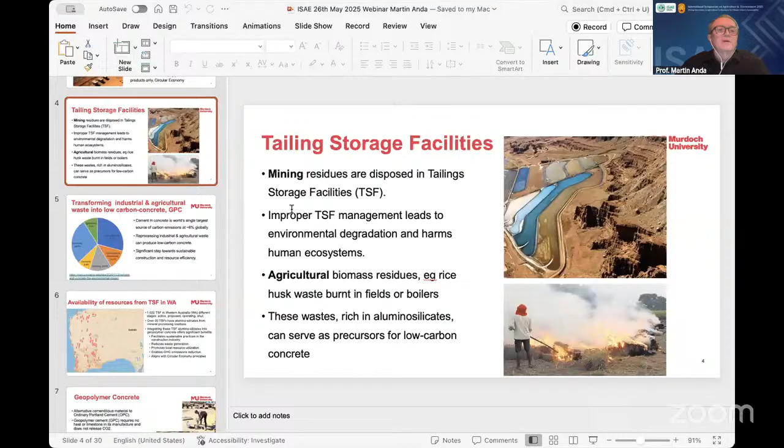Would you like me to share my slides from here? Should I share my screen with you, Mrs. Chinta? Or would you like to show the slides from your side? What's best? You can share, Prof. Martin. Okay, alright, let me have a look. Let me share my screen. Okay, how is that? Can you see my screen? Yes, now we can see the screen. Yes, very good, we can see your screen now.

Okay, so today everyone, Mrs. Chinta asked me to speak on industrial wastes to low carbon geopolymer concrete. So I will largely speak from the perspective of my work here in Australia, but as I mentioned, I was very lucky to be able to visit Sri Lanka in January for the first time.

Excuse me, Mrs. Professor Martin, sorry for disturbing you. Can you move to PowerPoint presentation mode? Yes, please, is it not in that already? Still mean full screen mode? Right, yeah, right now. Yes, okay, that's fine. There we are. Thank you very much.

Very good, there we are. Okay, so luckily, because I was able to visit Sri Lanka in January, I was able to meet Mrs. Chinta and other colleagues at the University of Ruhuna and come to understand that they have a great interest in this area of low carbon construction materials, particularly derived from agricultural residues and waste. I realised it was going to be a great opportunity for us to work together and collaborate. So let me give this presentation today with a focus largely from the perspective of Australia, what we're doing there, but also some insights into what may be possible in Sri Lanka if we were able to work together in this space of low carbon construction materials from industrial waste, particularly for geopolymer concrete.

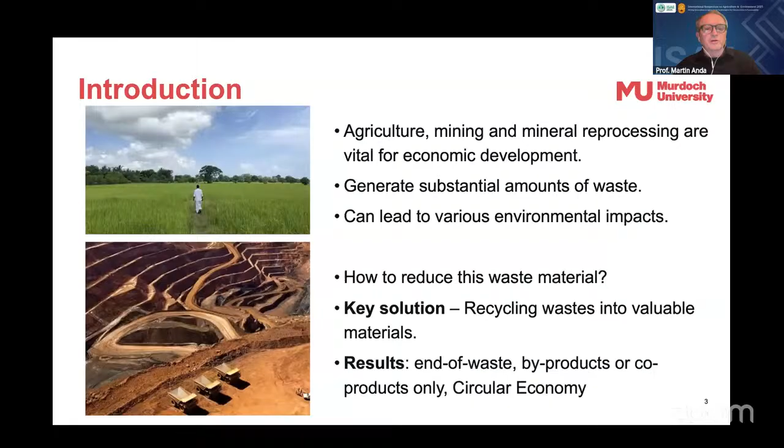In Australia particularly, we have a lot of tailing storage facilities. These are the mineral residues that are disposed of in the tailings dams. I guess there may be some in Sri Lanka as well, even though there's not a big mining industry there. For example, in the coal-fired power station in the north of the country, I haven't visited there, but I guess there may be some storage of the fly ash after the coal is burnt, in large storage dams, but I need to look into that further. A lot of that fly ash I know is already used in the concrete industries as a supplementary cementitious material.

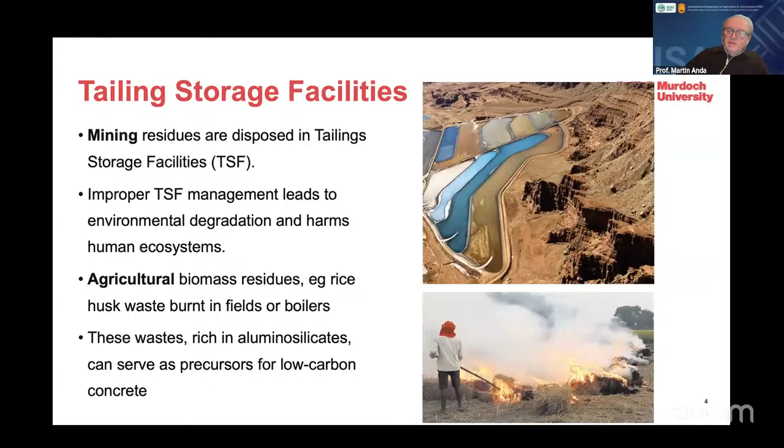Now, the improper management of these tailings can lead to environmental degradation, and can harm human ecosystems. Likewise, the agricultural biomass residues, for example, what we may see in Sri Lanka is the rice husk ash from when this is burnt in the fields or in the boilers for other processing operations. Now, these wastes are rich in aluminosilicates, and we can actually use these as precursors to make a low carbon concrete that we may call a geopolymer or an alkali activated material.

So if we look at transforming these industrial and agricultural waste into low carbon concrete, a geopolymer concrete, the background here is that cement is the world's single largest source of carbon emissions, as you can see in the pie chart here, at around 8% of global emissions. And the reprocessing of these industrial and agricultural residues can produce this low carbon concrete, for example, geopolymer or alkali activated cement. And this could be a significant step towards sustainable construction and resource efficiency.

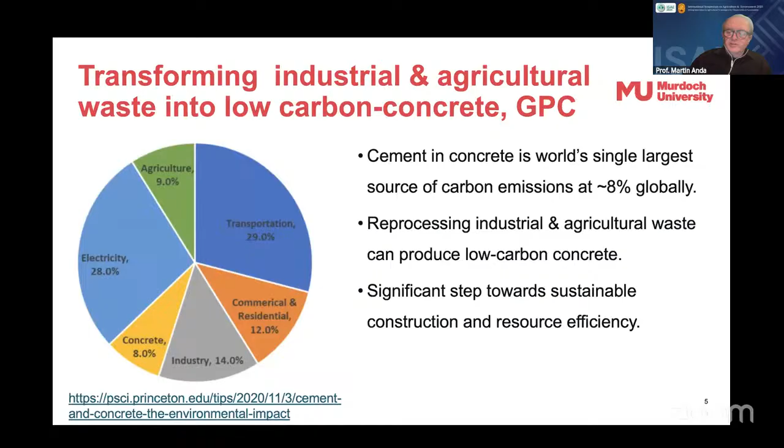Now, where I'm based in the state of Western Australia, we now know through some work that we've started by my research team, and in particular, the present paper is being written by one of our research students. Her name is Amitha Varghese, and in the work that she started, she identified from various environmental approvals that there are some 1,000 tailing storage facilities in various stages of operation. They're either active or proposed, or they're operating, or they're actually closed already. Some of them, of course, are very old. They might be 100 years old from old gold mining operations, for example.

And in her work, she was also able to establish that probably 50 of these do have the aluminosilicates that we're looking for to convert them into a precursor for geopolymer concrete. Now, by using these tailings and the aluminosilicates in them, where they occur, this geopolymer concrete offers a number of benefits and opportunities. It facilitates sustainable construction, reduces waste generation, promotes local resource utilisation, and enables greenhouse gas emissions reduction. And as mentioned, this aligns with those principles of circular economy.

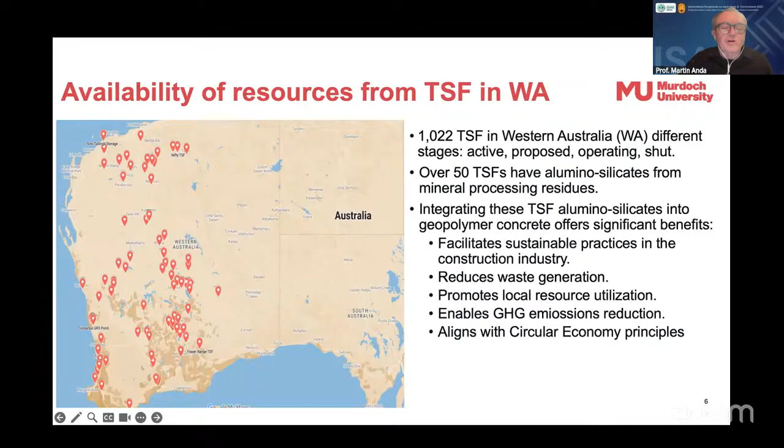Okay, so geopolymer concrete, what is it then? This is an alternative cementitious material to ordinary Portland cement, which is commonly used to make concrete at about 10% of the total volume of the concrete, along with sand, aggregate, small stones, and water. But geopolymer cement is quite different in that it requires no heat or limestone in its manufacture, and does not release CO2 in a way that you might know from the manufacture of ordinary Portland cement, which is made in very large kilns, where coal is typically burnt to do that in large rotary kilns.

And of course, Sri Lanka does manufacture cement, and there is a kiln, I believe, in the north, and Sri Lanka also imports clinker. And I was lucky enough to go with colleagues from University of Ruhuna to a cement factory in Galle while I was there in January. So that was great to visit that and see the large scale of cement production there. But of course, this is the high carbon footprint material.

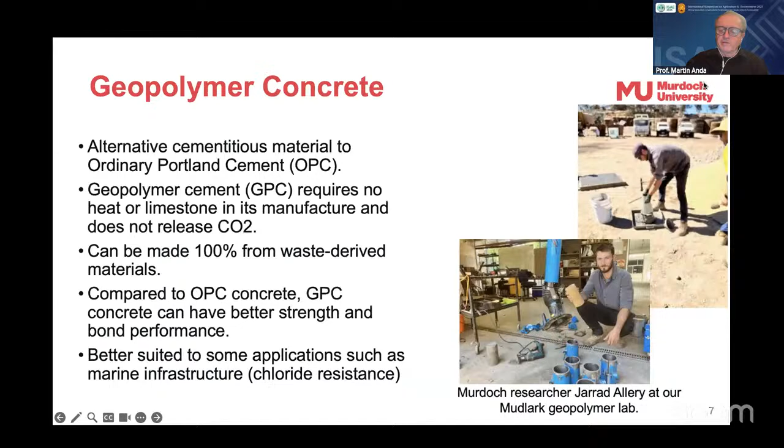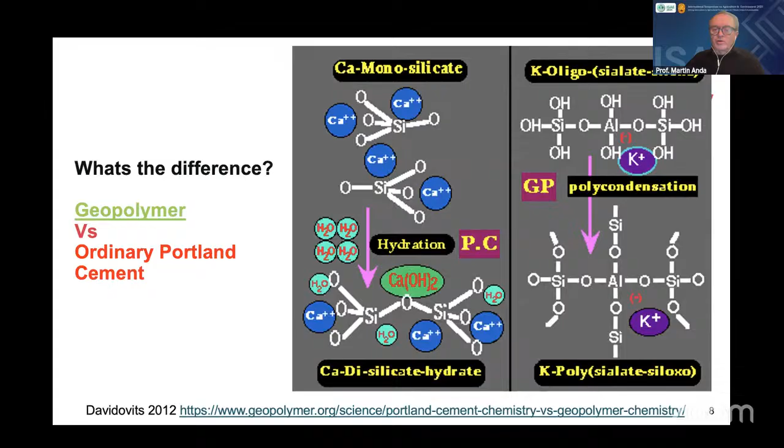If you want to learn more about the very complex chemistry behind these two different systems, you can download this paper by Professor Davidovits in France. He's the world leader, really, and has probably been working on this since the 1970s. But I did read once that it was a Ukrainian professor in the 1950s who first started this scientific work on geopolymers, so the history is quite interesting, in fact.

Now, if we look at the properties of geopolymer concrete, we find that, if prepared effectively, it can achieve superior strength and bonding compared to ordinary Portland cement. It can have superior mechanical properties in flexural strength, compressive strength, modulus of elasticity, and durability, and it can achieve chemical resistance as well, ensuring its durability in construction projects.

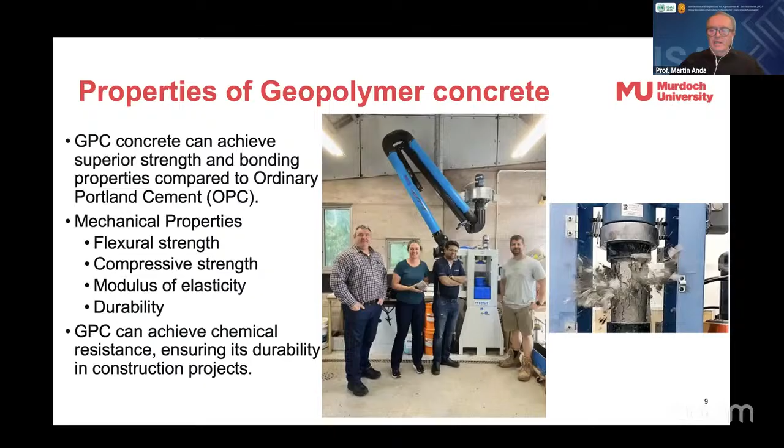Interestingly, one application where geopolymer is used, in addition to marine infrastructure projects, is actually in sewer pipes. In large sewer pipes, geopolymer can resist attack from various gases and chemicals that may occur in sewage traveling long distances. There's actually a company in Melbourne, Rocla, that manufactures on-order sewer pipes from geopolymer, so you can see some particular applications because of these benefits.

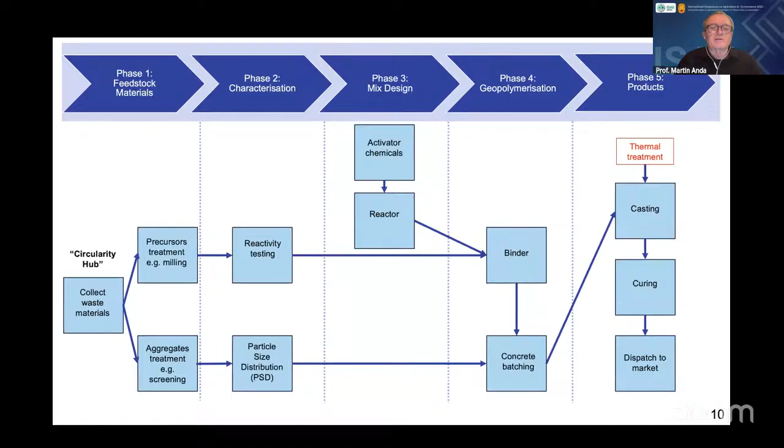Now, what I've done is prepared a diagram here that shows the different phases we go through in the manufacture of geopolymer concrete: 5 phases — the feedstock materials, the characterization, the mix design, the geopolymerization, and the products.

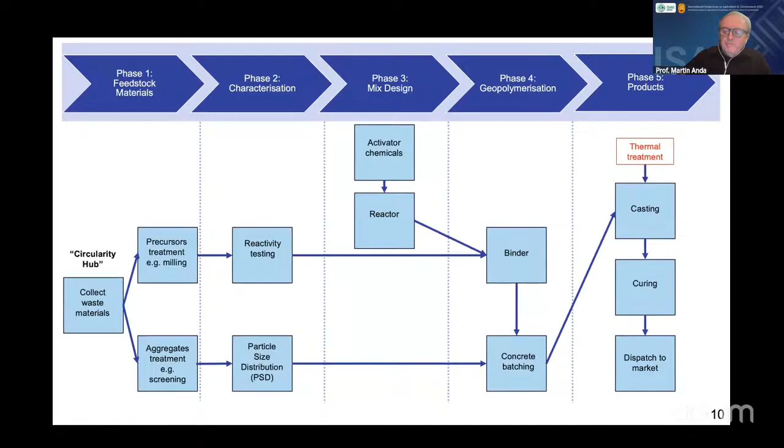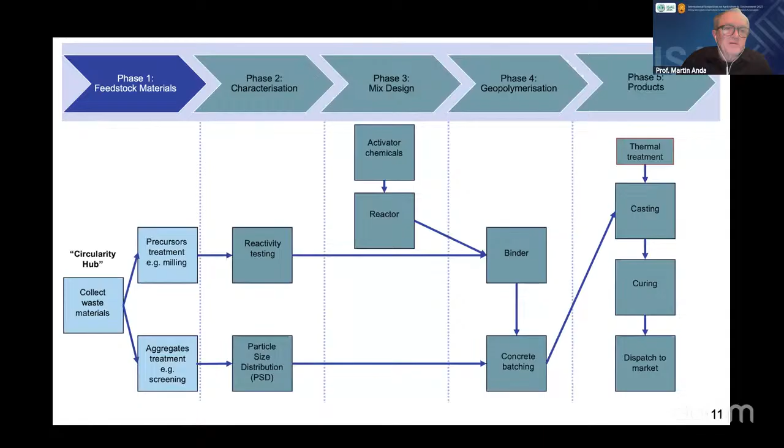If we start with phase 1, we want to collect the waste materials. It could be from tailings storage facilities, rice husk ash and boiler ash around Sri Lanka, or fly ash dams. What I've been looking at is these collection areas — we could call them circularity hubs — where we bring together a range of different materials to use both as precursors to make the geopolymer concrete, or as aggregates in the concrete itself. We may need some pre-treatment here, milling of the fly ash, for example, or screening of the aggregates if it's construction and demolition waste or coarse mine tailings.

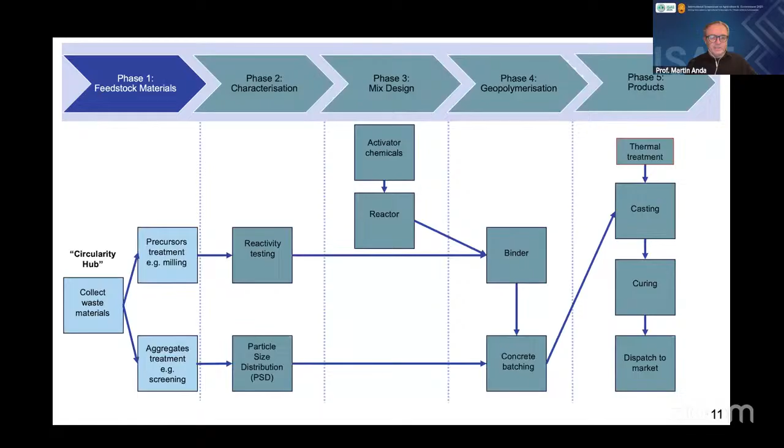In phase 2, we need to characterize these waste materials, and there's a whole raft of tests we'd do to determine the reactivity of the material. In other words, we're particularly looking at how much of the aluminosilicates in these industrial wastes are in the amorphous phase, and then we can determine a mix design from that — what type of activator chemicals we need to add. But if these wastes are going to be the aggregates, we might need to do a range of testing on them, such as particle size distribution and compressive strength.

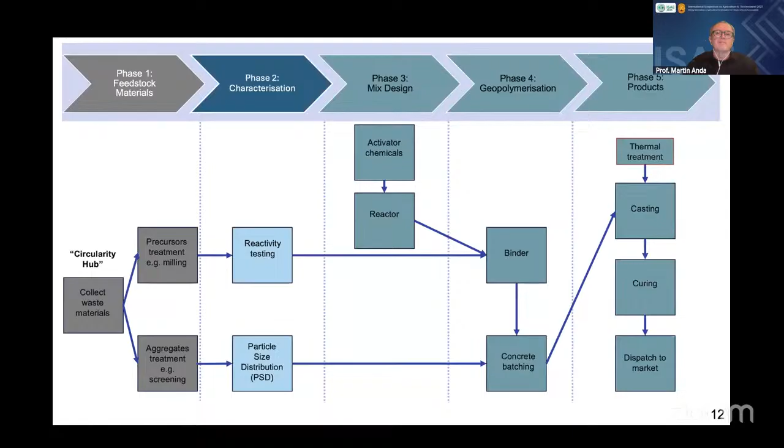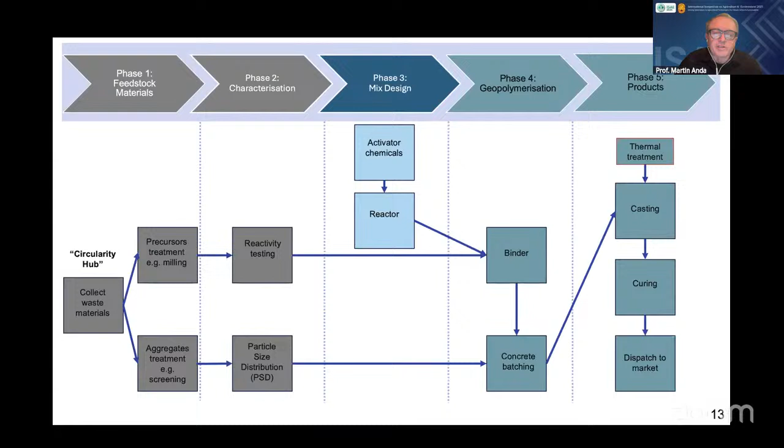Once we've done that, we can go into phase 3, which is developing the mix design, and the chemistry behind that can get quite complex. From that we can determine which ratios of activator chemicals, what proportions we need. Most commonly this is sodium silicate and sodium hydroxide, and the ratios are calculated to arrive at the mix design. These are then put in the reactor to achieve the right mix of these activator chemicals.

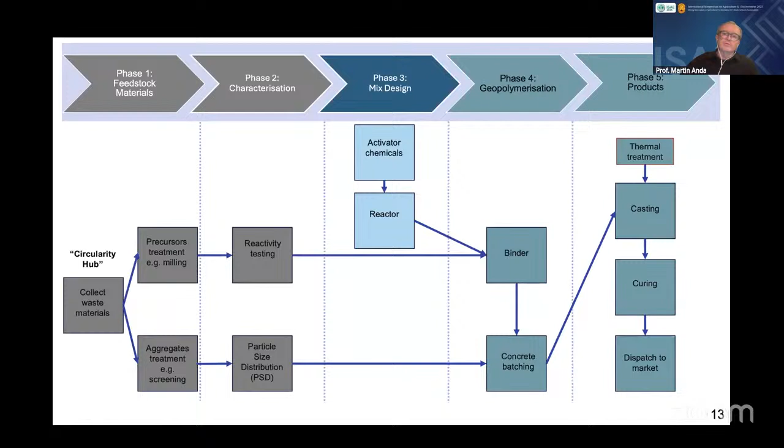Along with the precursor material, we go into phase 4, which is the geopolymerization, where we want to prepare the binder from the precursor and the activator chemicals. Then we go into the concrete batching plant with the aggregates. There may need to be a small amount of water added just to get the ratios and workability right, but not in the same way you add water to a normal concrete batching plant — you have to be very careful that you don't add too much, and it's usually a small amount in the mix design.

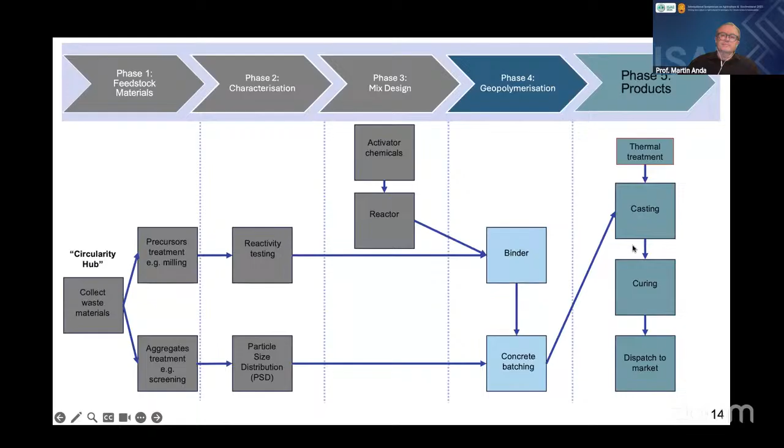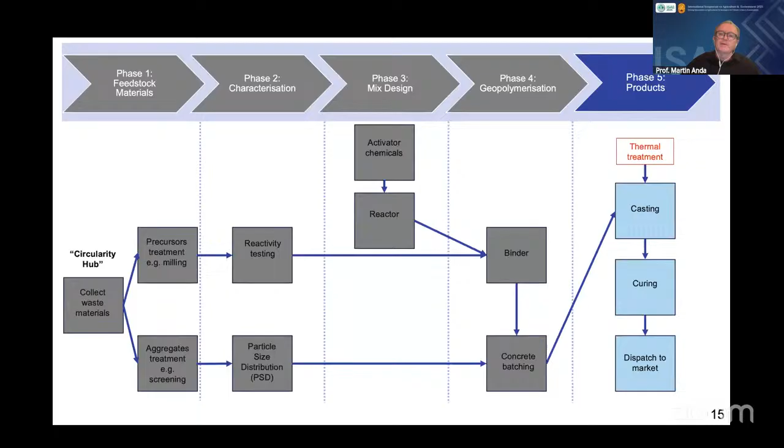And finally, we are now going into the product manufacture. It could just be straight ready-mix concrete, but it could be various cast products - bridge beams, low-strength blocks - and then we might need thermal curing to increase the strength of those. In many cases, lower strength products like blocks and bricks, which may only need to be 10 megapascals or less, can just have ambient curing. And then, of course, we dispatch to market once they've cured.

These are a range of feedstock sources here. Just some case studies, really. We probably don't need to spend too much time talking about this, but...

But in that particular mix design for that first case there of Collie, we mix the residue from bauxite refining, we call it red mud, and then we add the activator chemicals and go into concrete batching.

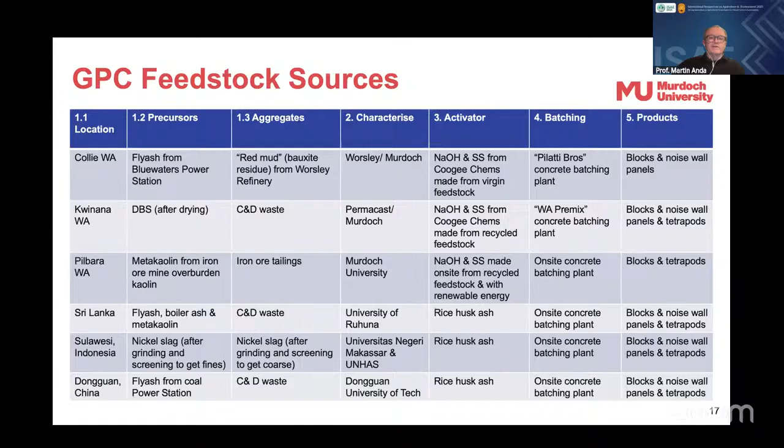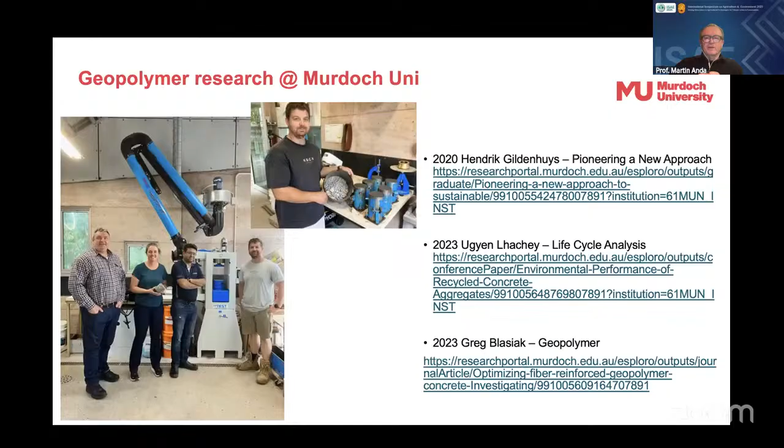Now, getting back to Murdoch University, we started the research in 2020, and that's when we established our lab. And you can see some of our research team there, and this photo is of Greg Blasiak. He's continuing with his PhD now, and he completed, first of all, his engineering honours thesis. He's standing next to the compressive strength machine there, and he's got some of those blue cylinders ready to cure those samples, and when they're cured, we'll put them in this machine and test the compressive strength. And you can see his paper there on Geopolymer that you can download from his honours research.

Now, we have another PhD student in our team at the moment, Ugyen Lhachey from Bhutan, and she's been particularly focused on using recycled aggregates for low carbon concrete, and her work has shown that these are more than sufficient in road construction, for example, and we can use them in geopolymer concrete as well, and achieve the same results under the standards as you would for normal virgin sands and aggregates.

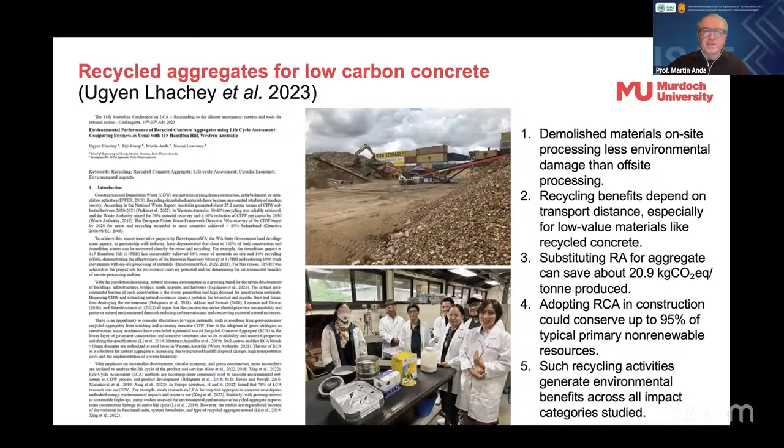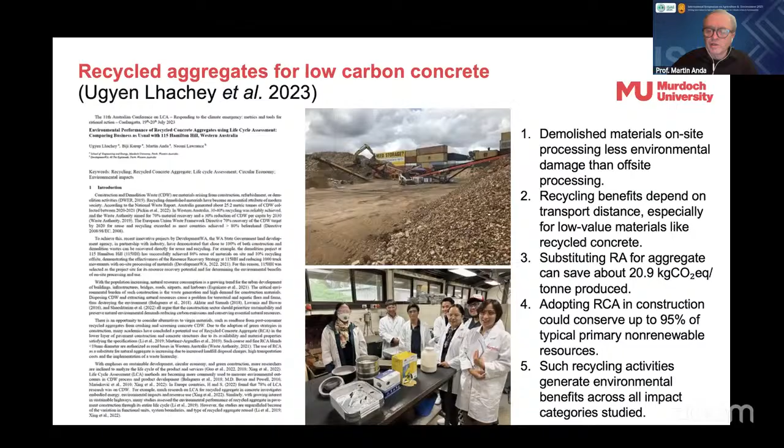So we have very large stockpiles of this demolition and construction waste, and so if we can harness these by following the principles developed by Ugyen in her research, then we can have enormous environmental benefits by having done this. And you can see Ugyen here in the bottom photograph in our mineralogy lab, and she's just showing some of our master students the various sieving techniques and screening necessary to get the particle size distribution worked out from these aggregates.

If we look at some of the other research that's occurred in Western Australia by Professor van Riessen, he produced with his PhD students some very useful papers on how we can develop a procedure for having the mix design for geopolymers using X-ray fluorescence machine and X-ray diffraction machine. And so this gives us the data that we need in order to prepare the mix design for a geopolymer.

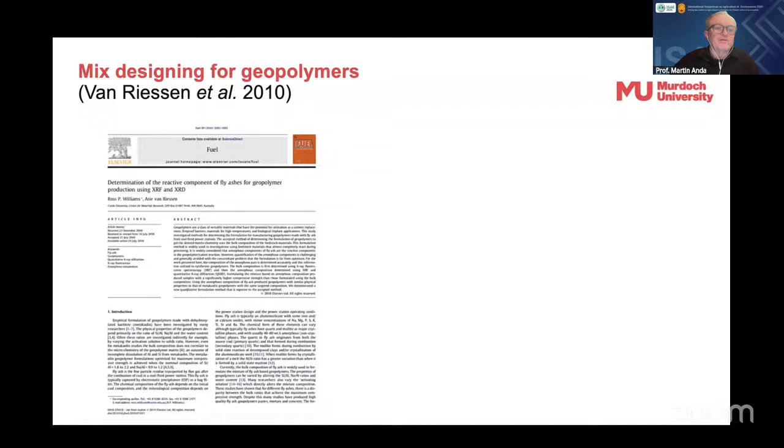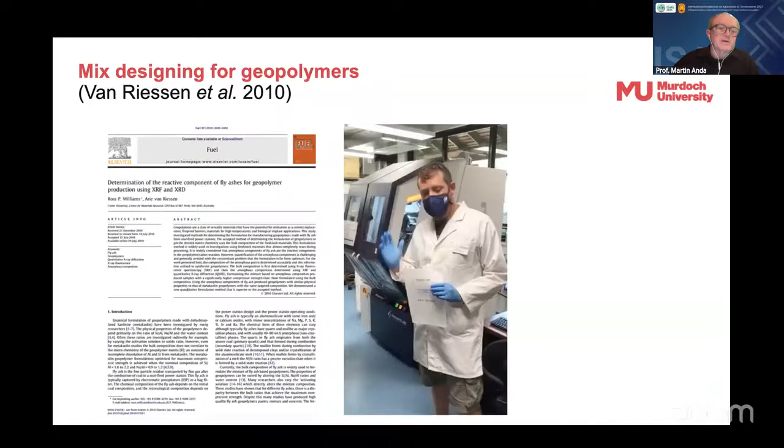And luckily at Murdoch University, we also have a very good XRD machine, a Rigaku unit from Japan. And there's Dr. Hans Oskieski, who's in charge of that machine, and we're able to use that to do some of our mix design work for preparing these geopolymers.

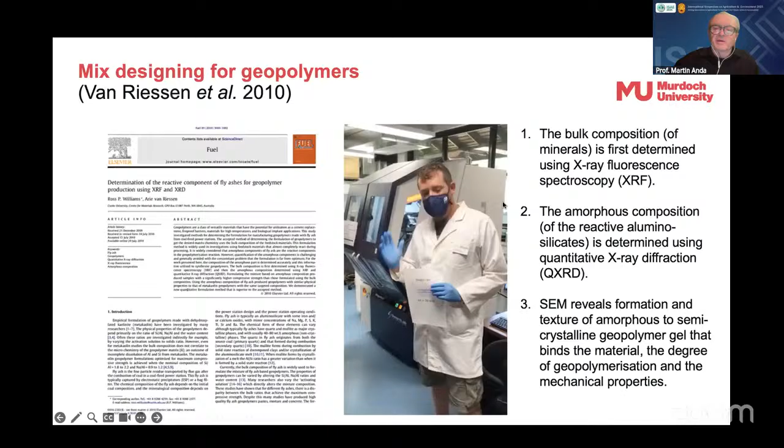So we do that by determining the bulk composition, firstly with X-ray fluorescence, and then the amorphous composition of the reactive aluminosilicates is determined using this quantitative XRD method. We can also use scanning electron microscopy to reveal the formation and texture of the amorphous to semi-crystalline geopolymer gel that binds the material, the degree of geopolymerization, and the resulting mechanical properties we get after preparing the mix design and casting, before we start testing it.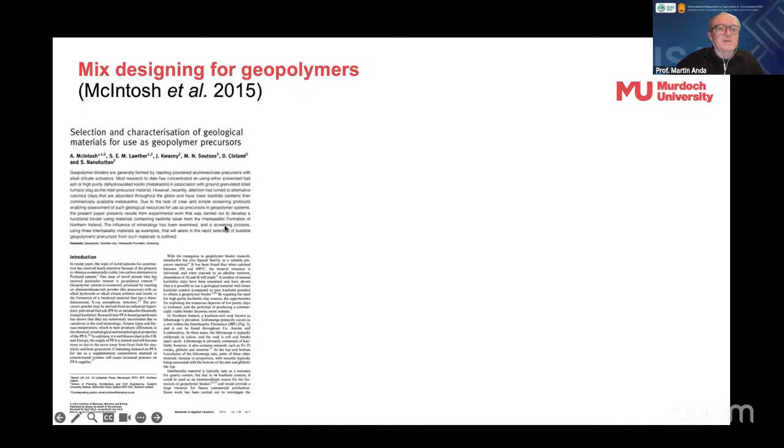On mix designing, there was some interesting work done in the UK by a team of people who wanted to develop a straightforward method for using calcined clays, metakaolins, as well as other industrial waste like granulated blast furnace slag. They used a range of techniques like geological survey maps, XRD, thermogravimetric analysis, and compressive strength testing to put together a set of standardized practices, like a screening test, shown there in that flow chart.

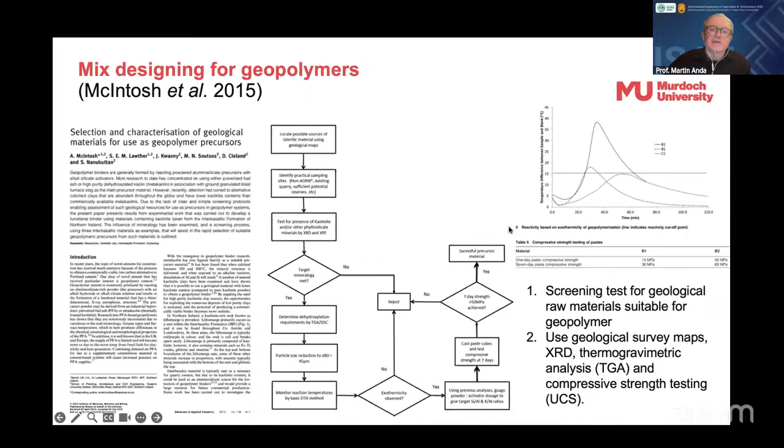That became a particularly useful structured method to do that, and they show the results in their paper there.

Now, what's interesting in Western Australia is that we have a growing lithium industry. We mine the spodumene ore at several locations, and so far we have three lithium refineries. These refineries produce lithium hydroxide, which is exported typically to China, where it's turned into batteries for phones, electric vehicles and so on. But that's only about 10% of the ore that actually ends up as lithium hydroxide. About 90% of it is actually a residue, called delithiated beta spodumene.

This residue turns out to be very much like fly ash from a coal-fired power station, in that it has a high proportion of reactive amorphous aluminosilicates, and that can serve as an excellent precursor for geopolymer concrete. But again, getting the mix design right is quite tricky using those various test methods I mentioned, and only now are we starting to learn how to do a fairly reliable mix design. This is, as I'll mention shortly, under commercial production trials at the moment.

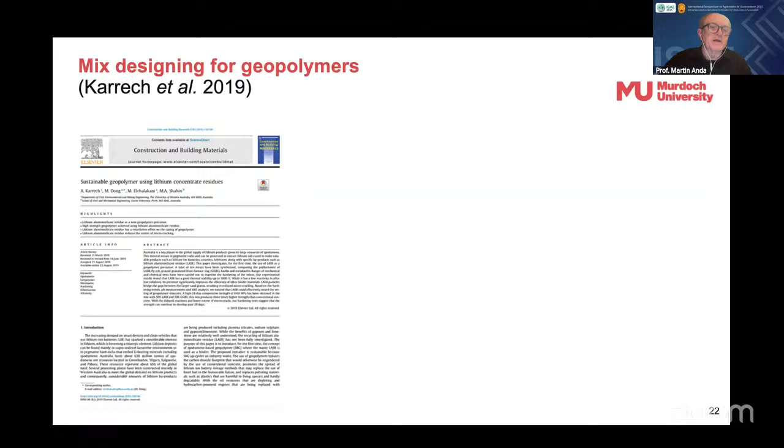This particular research in this paper was done by Professor Ali Karrech at the University of Western Australia. He's written a number of papers on using lithium residues, particularly focused on mix designs with blast furnace slag from steel mills. But of course, in Western Australia, we don't have a steel mill.

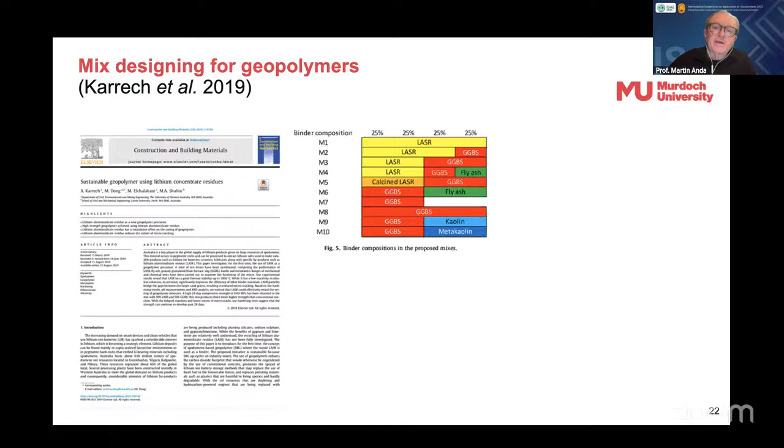So I was particularly interested in finding new mix designs that did not rely on adding any blast furnace slag. We are now relying more on mixes with fly ash and kaolin, without any blast furnace slag at all.

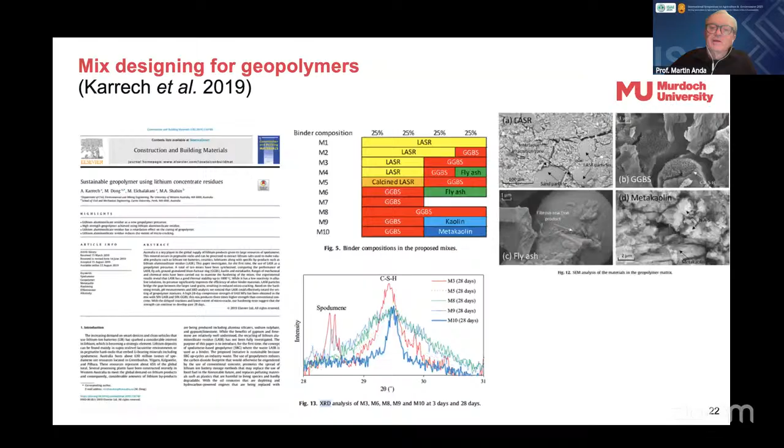This chart that Ali Karrech has done is just showing the typical XRD analysis spikes that you're looking for in the geopolymer product, and the SEM analysis that you look for in both the precursor materials and also in the product afterwards. This scanning electron microscope allows us to study the geopolymer morphology, the microscopic structure, and understand its macroscopic behavior. So that was really useful work by Professor Ali Karrech.

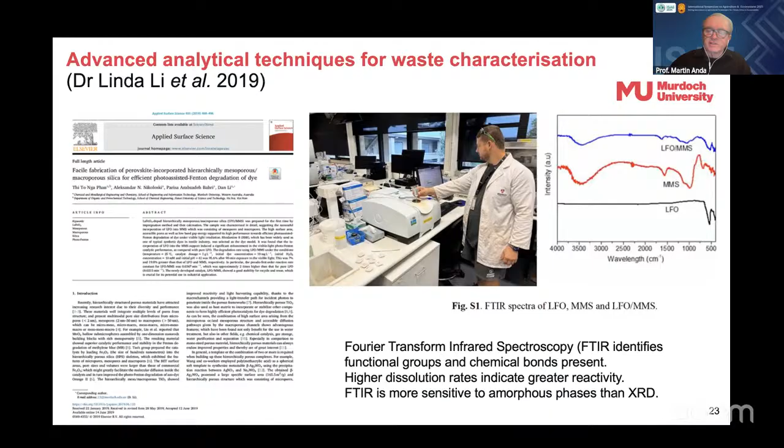But what's been really interesting is a new approach we're testing at the moment, and that is the co-calcination of different industrial waste. Of course, clays like kaolin do need to be calcined from kaolin to metakaolin, so that we can shift them from the crystalline phase into the amorphous phase, so they can become a reactive precursor.

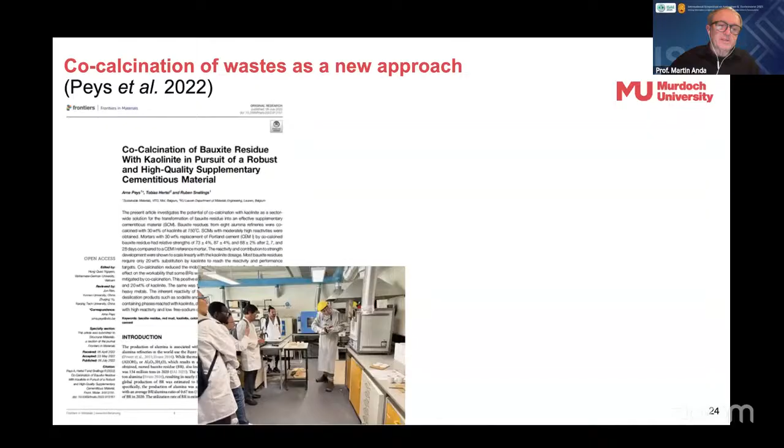What we found is that we can actually co-calcine this red mud and kaolin at 750 degrees Celsius, and it can be used as an SCM or a geopolymer thereafter. And the great thing is that, because the challenge of using industrial waste materials in public infrastructure...

...you do run the risk of leaching heavy metals and other contaminants into the environment. So we have to do leaching tests under particular well-defined standards to determine the extent of this risk. What this co-calcination method has shown is that it decreases the leaching of particular heavy metals like chromium from the geopolymer mortars.

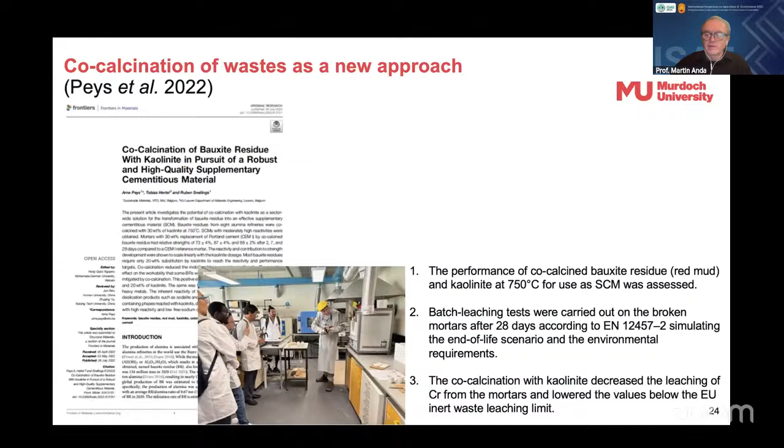We were able to keep the concrete within the inert waste leaching limits as a result. So this is what we're actually working on now with similar materials in Western Australia to what Peys used in Belgium, and we think it holds great promise for the future for recycling these more difficult industrial wastes.

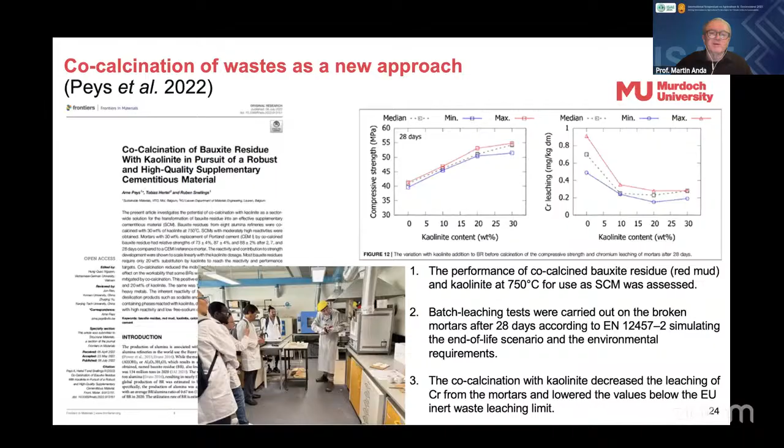What it finds is that typically an optimum co-calcining percentage is around 20%. So this is the mix designs we're working on at the moment, and we'll take these into production with those companies in the near future.

So this is where we're at the moment. This is the final and most complex phase of understanding this leaching of heavy metals and other substances from the cast geopolymer concretes. There's a particularly useful European standard, but a number of countries have their own standards, and there are now a number of papers

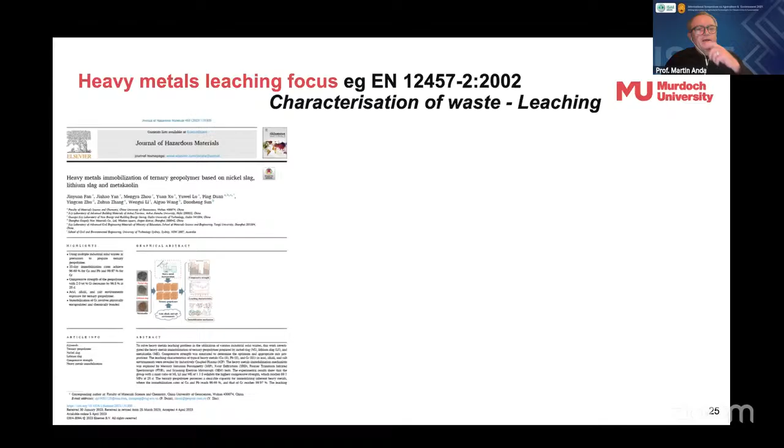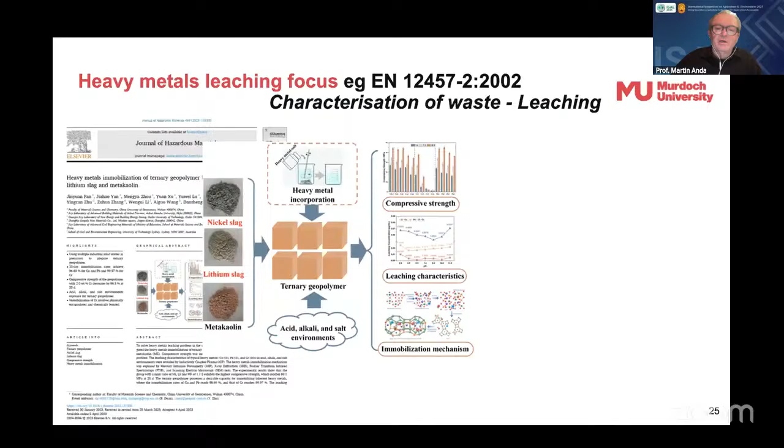that have conducted these tests with industrial waste going into geopolymer. In this example from China, they're looking at the very same mineral processing residues that we're interested in for Australia, which are nickel slag, lithium slag, and metakaolin. These are of great interest in Indonesia as well, where we're also working. This is just their graphical summary abstract, showing the steps they've gone through to look at these different geopolymers and their leaching characteristics, and to learn how this immobilization of heavy metals actually occurs.

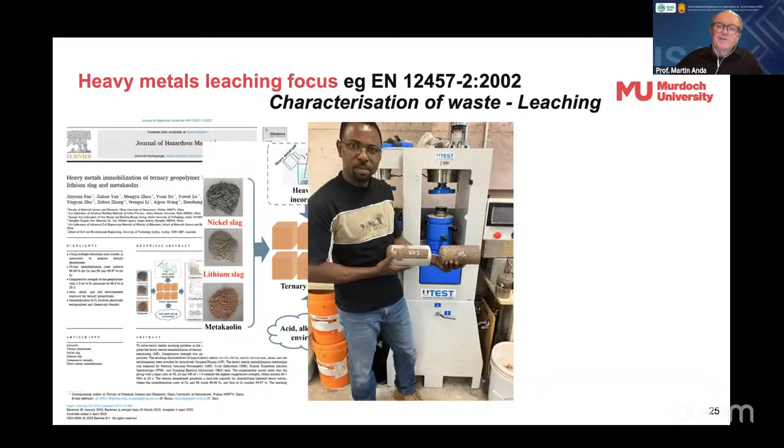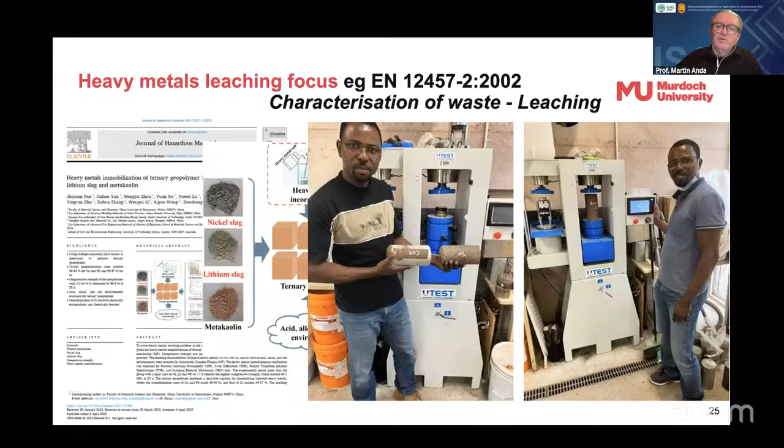We had in fact started some of this work in our own lab in a very rudimentary manner with Franklin. You can see in the photograph when he first started working on the red mud residue from the bauxite refineries we have in Western Australia. He had started that basic leaching work, and now Greg is taking this into a more advanced level. We hope to start commercial production trials with these residues in the near future as a result of that work Greg's doing now.

So all of this is now on a journey to commercialization because we have an IP investment partner, a company now called Green 360 Technologies, formerly known as Suvo Minerals, a kaolin miner from Victoria. They've had an IP agreement with Murdoch University and formed a joint venture partnership with the largest precast concrete company in the state, which is Permacast, and we're now in commercial production trials on some of these mix designs.

Just to reflect on the history so far: 2020 was when we first started our geopolymer lab at Murdoch University in a very simple way, and little did we know it was going to be so complex to actually get to this point.

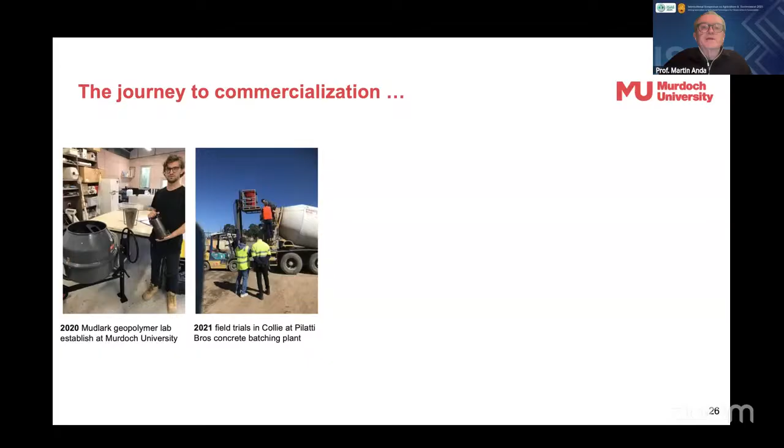In 2021, we started some very basic field trials in Collie, where the fly ash is generated from the coal-fired power stations, with basic field trials at the concrete batching plant.

And then we actually went into the Muja coal-fired power station in Collie, probably the biggest coal-fired power station in Western Australia, and in one of the empty warehouses we started manufacturing wall panels with geopolymer made at the batching plant, and that actually worked effectively.

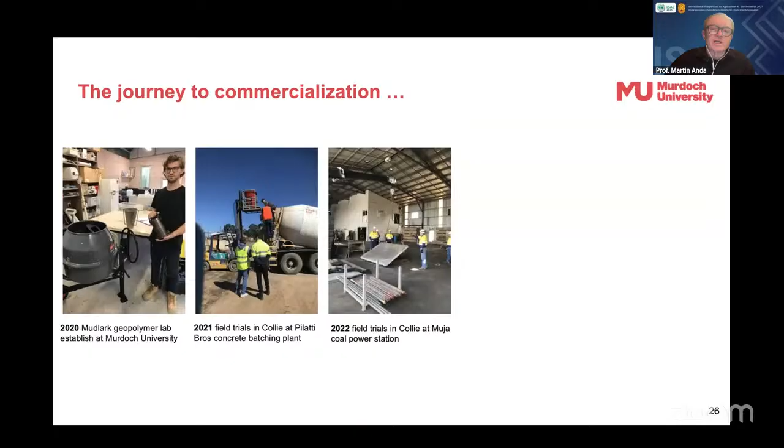We did have an unsuccessful field trial later in 2024, trying to get ready mix to work. That was also quite difficult, so we went back to the drawing board in 2024.

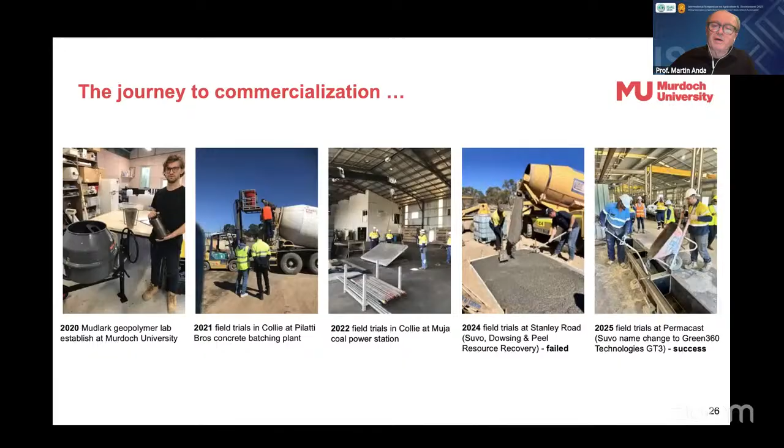I think we're in a much better place now with the mix designs Greg's working on at Permacast, and that's where we're up to in 2025, that last photograph—Greg at work in one of the big warehouses at the Permacast concrete factory. We're now trialing a number of different mix designs, including the fly ash, the kaolin, the red mud, and the delithiated beta-spodumene, with a number underway now, and very soon we should be able to ramp up into commercial scale production with those geopolymer concretes.

The thing people are waiting on from us now are the actual data sheets, but we can only complete these as we go into this final phase of testing using those leach methods, to make sure we're not leaching any contaminants like heavy metals into the environment.

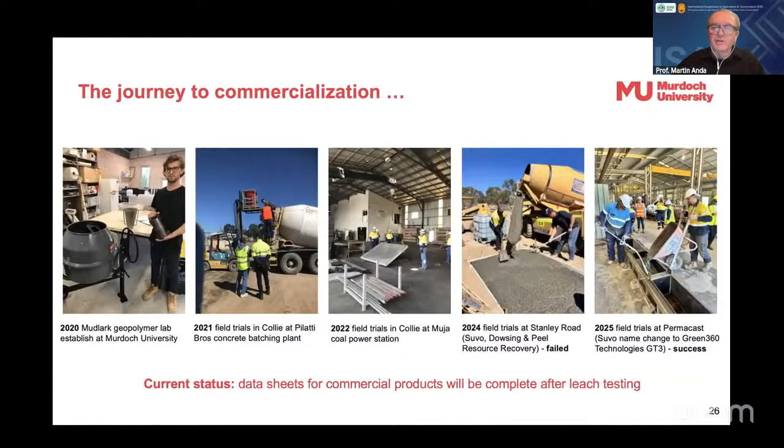One of the other pieces of work we're doing is Amitha's work on database development. The aim is to support sustainable initiatives in various countries in order to produce this concrete from mining residues. The database will store detailed information on these residues, like their location, chemical composition, volume, and environmental conditions, and to develop that fully we want to make use of geospatial tools and stakeholder engagement.

We will be looking at various case studies at sites in Western Australia, Indonesia, and Sri Lanka too, we hope.

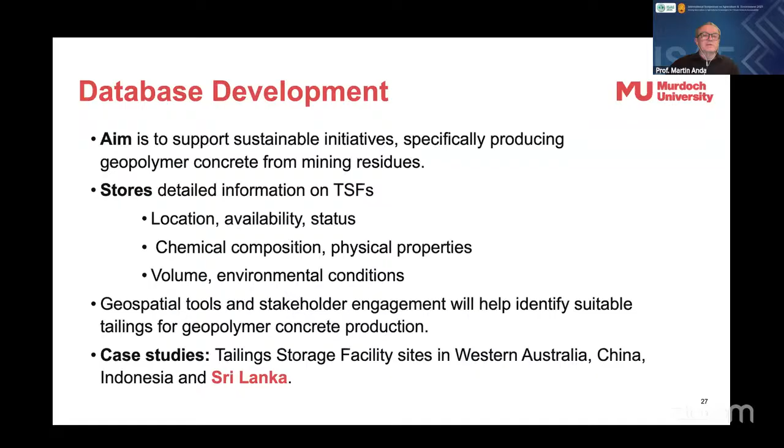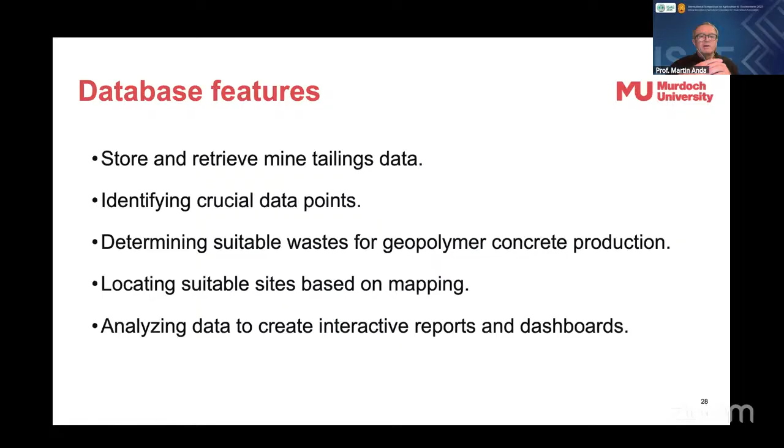The features will store and retrieve mine tailings data, identify crucial data points, determine suitable wastes for geopolymer production, locate suitable sites based on mapping, and analyse data to create interactive reports and dashboards.

Particularly with that database, what we're hoping to do is transform agricultural, mining and construction residues into low carbon concrete, with a particular idea to address two chief challenges: carbon emissions and industrial waste management. We want to improve the efficiency and sustainability of tailings management and resource recovery, and reduce the environmental impacts of this waste storage.

This could enable low carbon eco-concrete for sustainable developments, and this would contribute to the creation of a circular economy. In particular, this interactive database will assist the transition to a sustainable construction industry, and will help map and enable the identification of alternative materials and local sourcing.

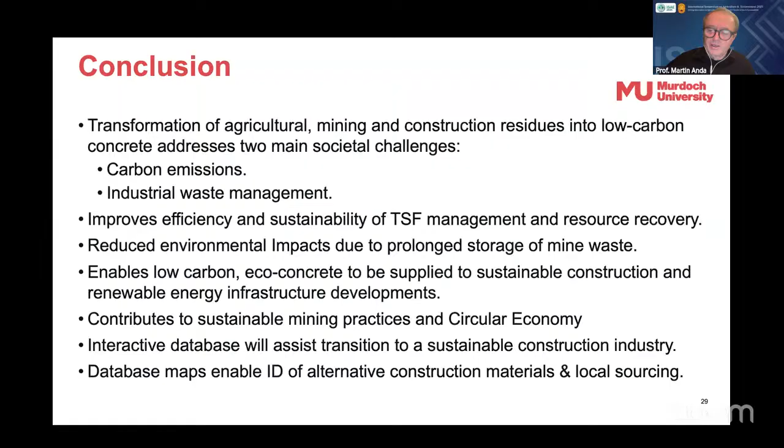Yes, thank you so much. It's a very inspiring speech, the presentation on industrial waste to low carbon geopolymer concrete. I think it is a kind of sustainable material what we need in future for sustainability of the construction industry. It is very important. Even now the presentation is open for questions, and one question is there.

How does the use of industrial byproducts such as fly ash and slag in low carbon geopolymer concrete affect its mechanical properties and long-term durability compared to conventional Portland cement?

Fly ash and slag are the classic precursor materials that have often been used historically in a number of parts of the world to make geopolymer. These materials, fly ash and slag in particular, have been shown to be amongst the most effective precursor materials, and can achieve the same levels of mechanical properties and durability that you get from conventional Portland cement. So yes, particularly those two industrial wastes can actually achieve similar properties to normal concrete. That is the answer to that question.